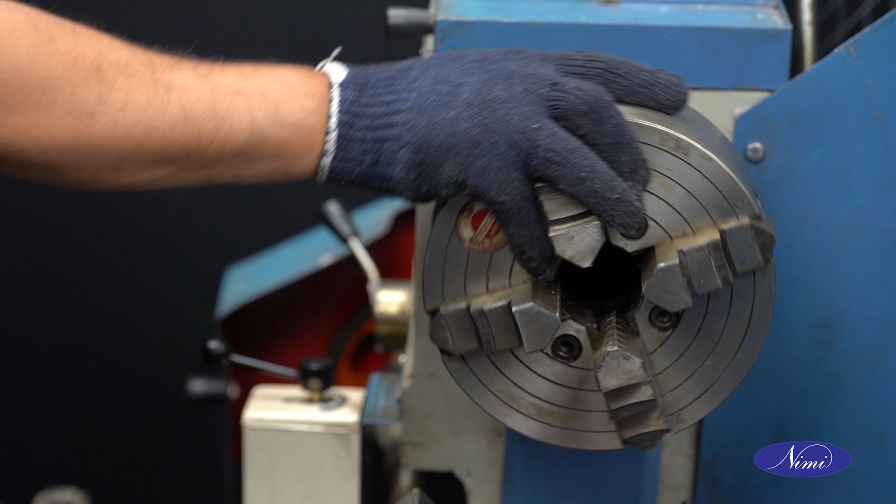Welcome to the session on mounting of chuck on machine spindle and unloading 3-jaw chuck and 4-jaw chuck. Let us begin with the session.

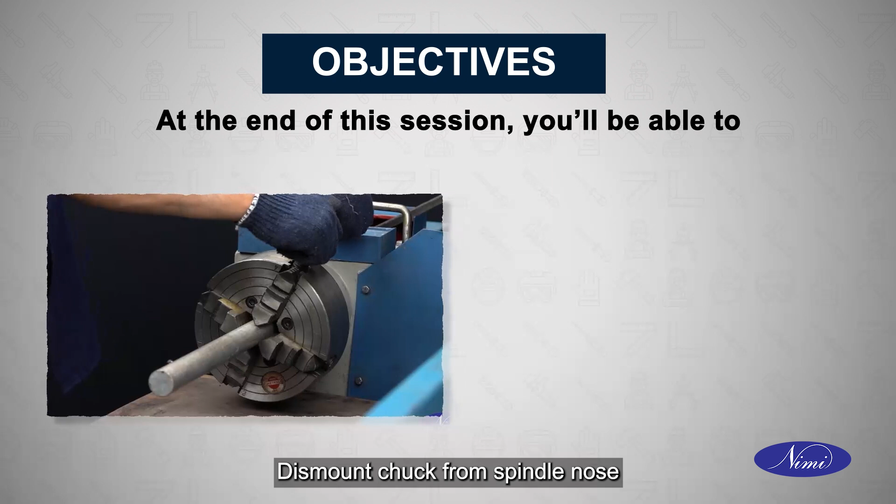Let us now take a look at the objectives of this session. At the end of this session, you will be able to dismount chuck from spindle nose, mount chucks on spindle noses.

Let us now learn about mounting chucks on spindle noses. Switch off the motor. Place the chuck on the wooden block and slide it close to the spindle nose. Set the lever to lock the spindle.

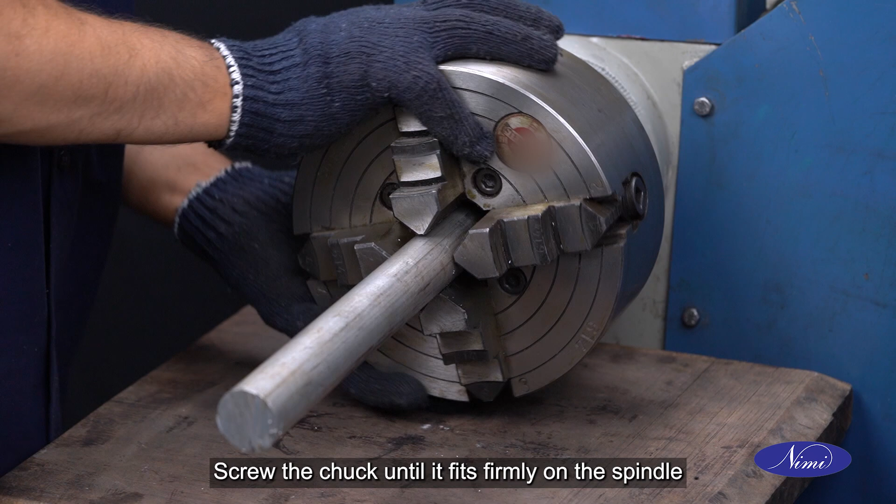Turn the spindle clockwise by hand and engage the chuck on the spindle. Screw the chuck until it fits firmly on the spindle. The chuck should easily screw into the spindle.

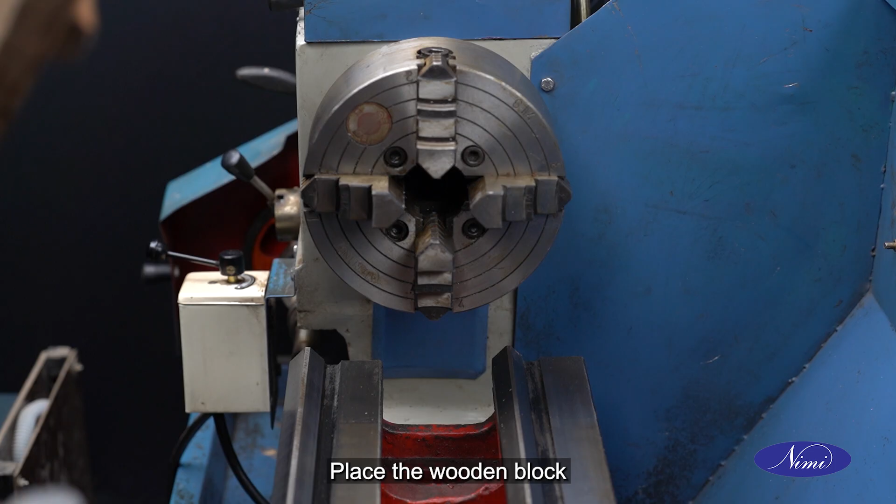Let us now learn about dismounting chucks on spindle nose. Switch off the motor. Set the lever to lock the spindle. Place the wooden block between the chuck and the lathe bed. The thickness of the wooden block should be slightly less than the distance between the chuck and the lathe bed.

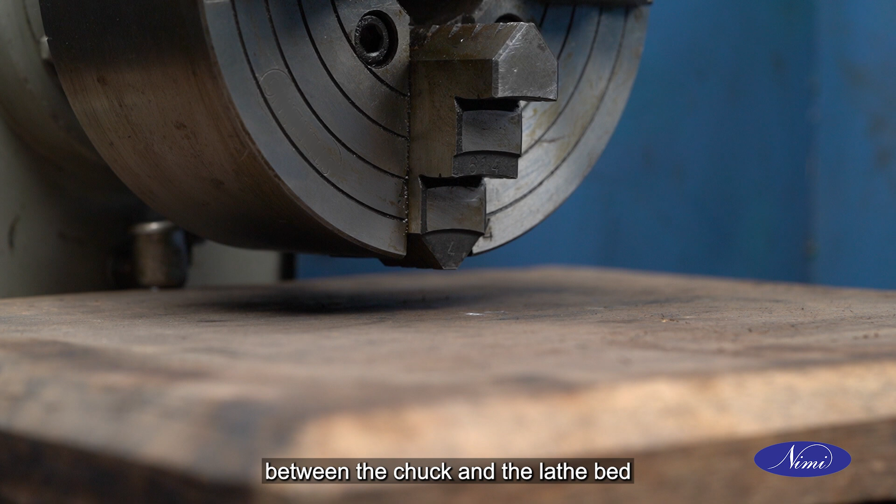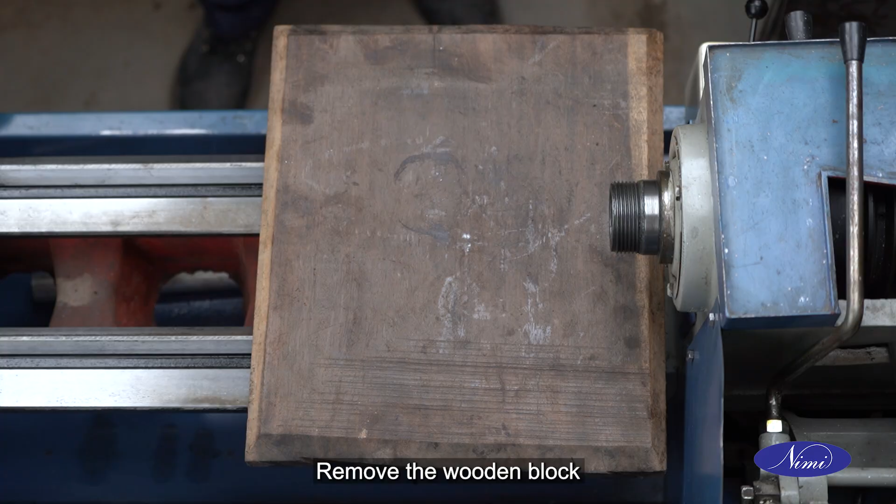Turn the lathe spindle anti-clockwise by hand to loosen the chuck from the spindle nose. Unscrew the chuck from the spindle. Remove the wooden block. Let us now learn about mounting of chuck on the cam lock spindle.

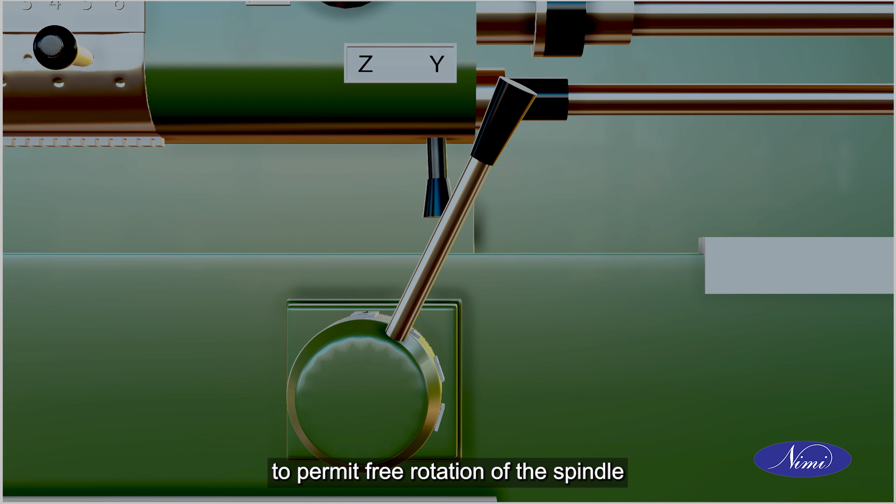Disengage the clutch to permit free rotation of the spindle. Insert the correct chuck key into the cam locking screw on the spindle. Turn each cam locking screw so that the registration line is vertical with the corresponding line on the spindle.

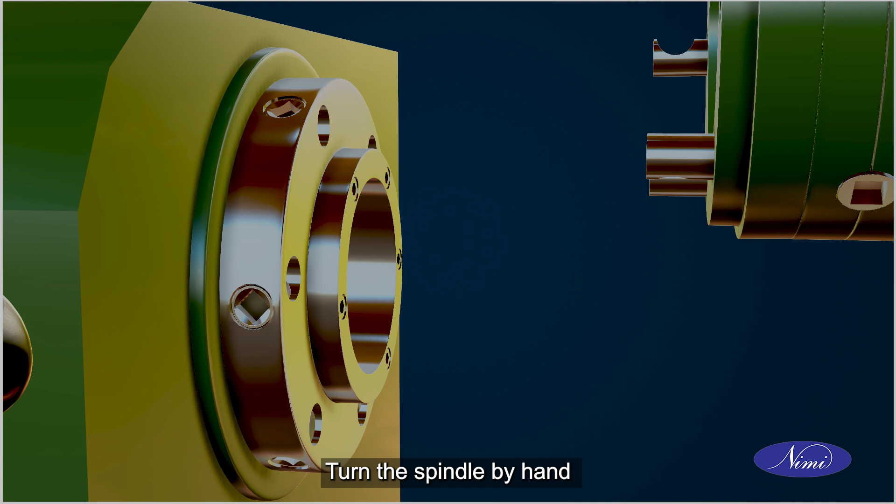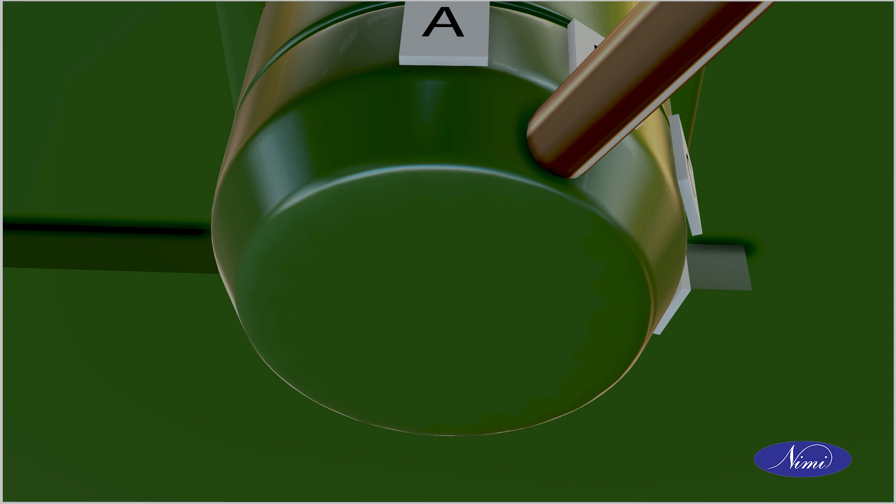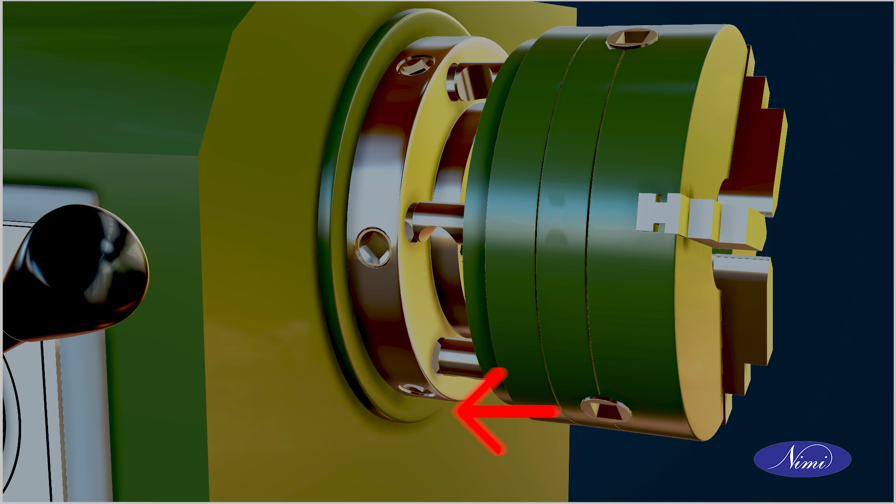Turn the spindle by hand until the clearance holes on the spindle align with the cam lock studs on the chuck. Set the speed change lever to the lowest RPM. Push the chuck on the spindle. Tighten each cam lock screw in a clockwise direction.

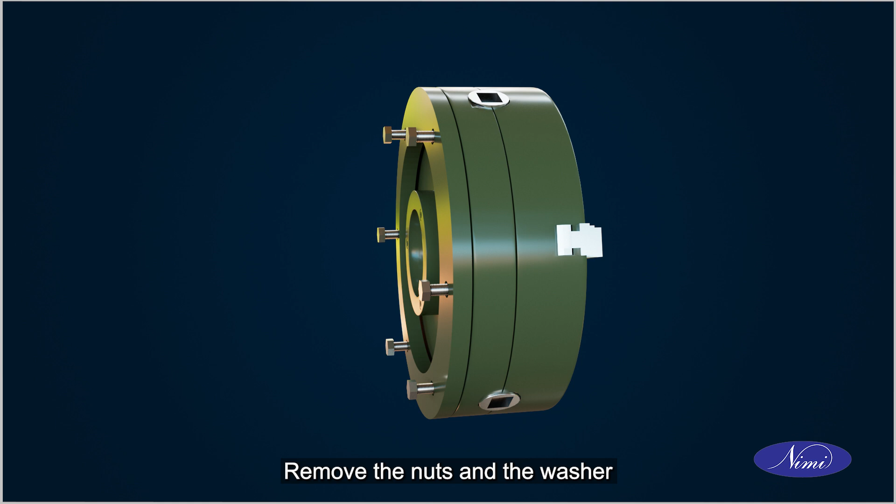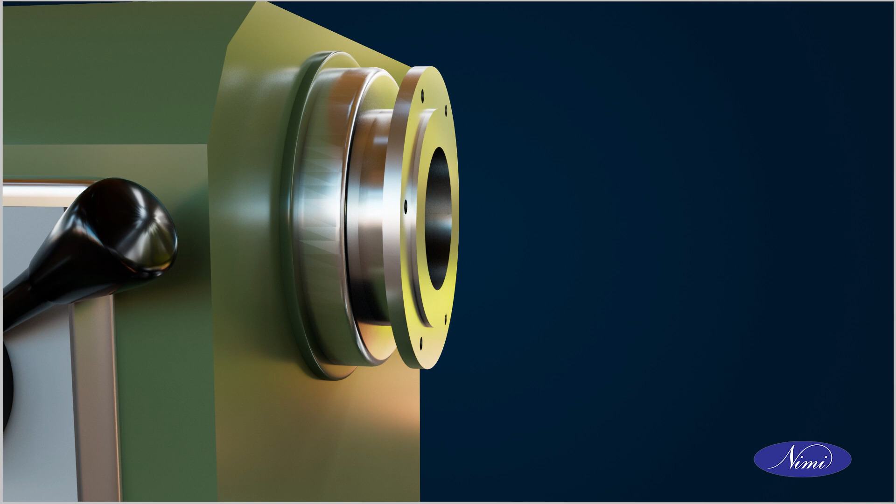Let us now learn about the mounting of the chuck on a bolted spindle. Remove the nuts and the washer from the studs on the chuck. Disengage the clutch to permit free rotation of the spindle. Turn the spindle by hand until the key in the spindle lines up with the slot in the chuck.

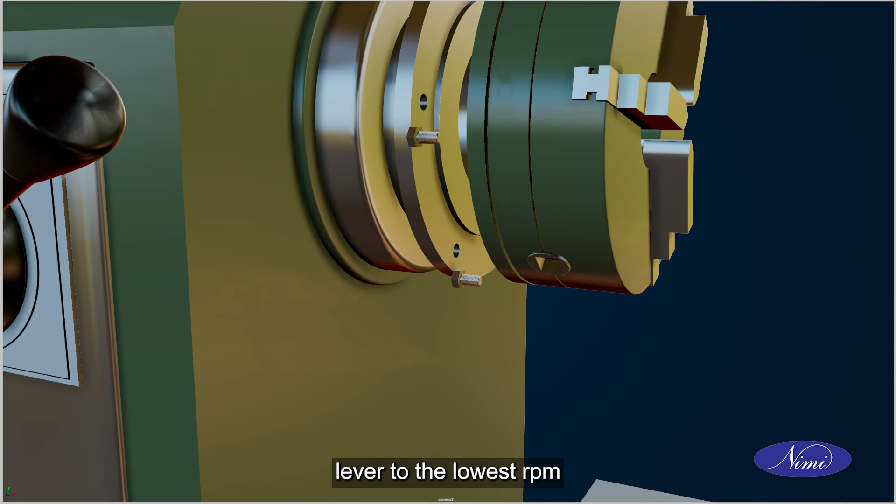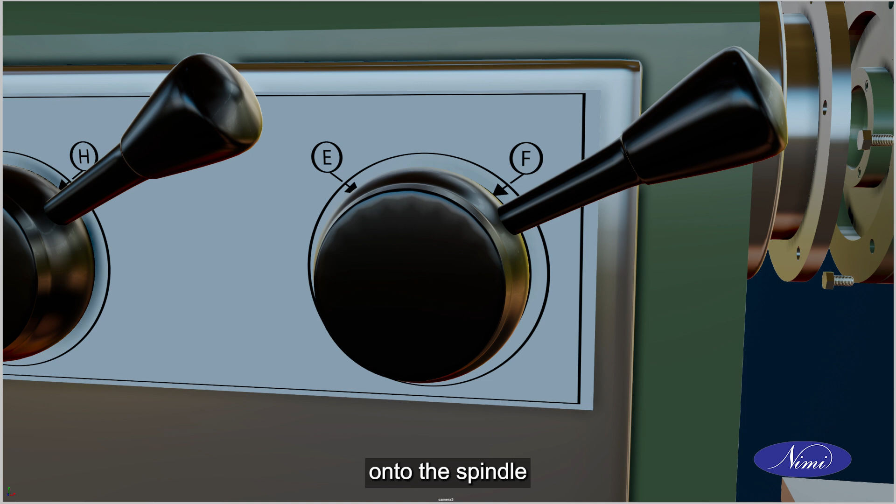Set the speed change lever to the lowest RPM. Push the chuck onto the spindle. Fit washer and nuts to the studs.

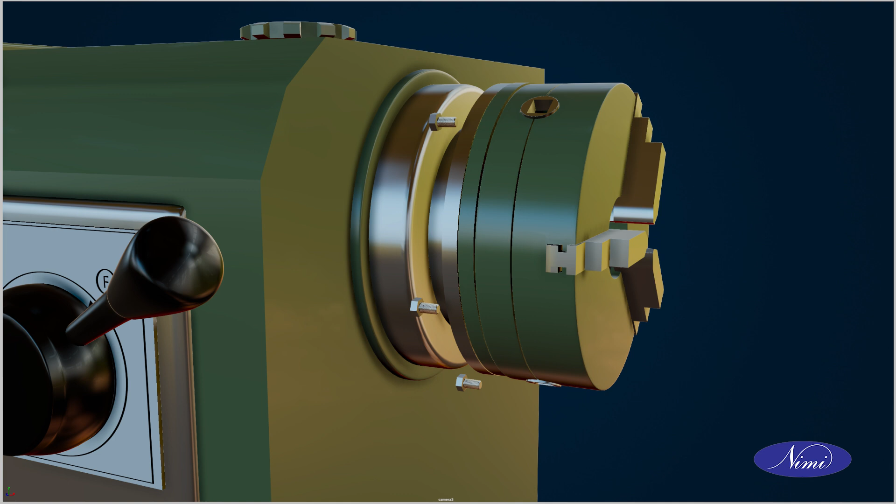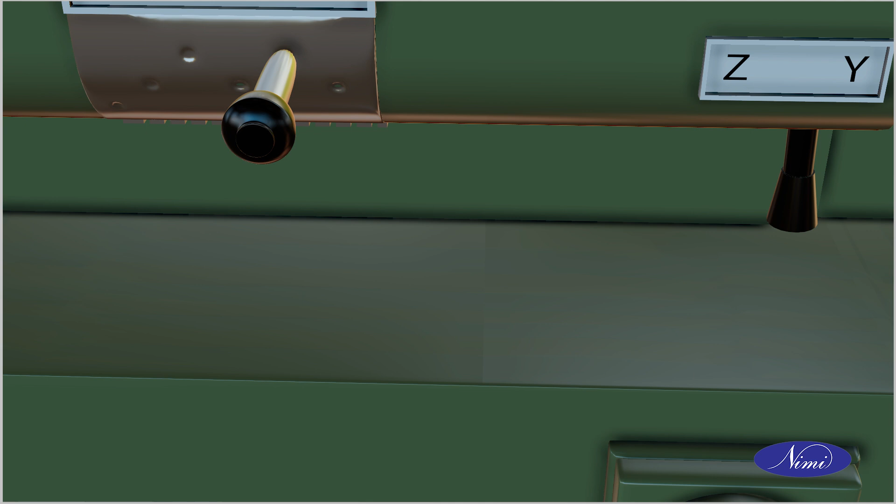Let us now learn about mounting of the chuck on a taper spindle. Turn the spindle by hand until the key on the spindle nose lines up with the keyway in the chuck. Set the speed change lever to the lowest RPM. Push the chuck onto the spindle.

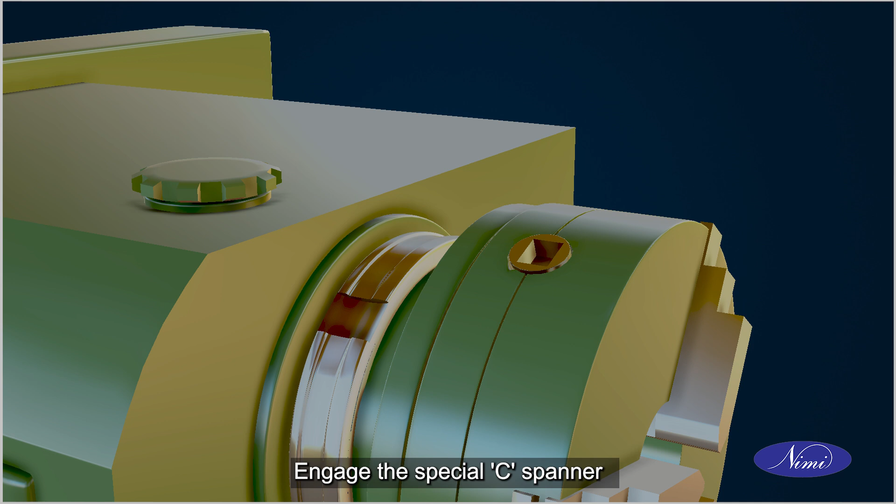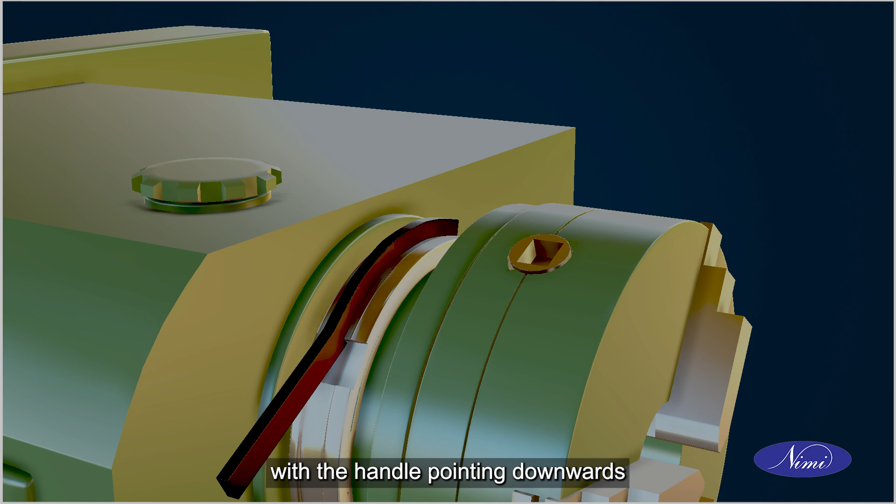Turn the locking ring anti-clockwise. Engage the special C spanner on the locking ring. The spanner should fit around the top of the locking ring with the handle pointing downwards. Grip the end of the handle with one hand. Firmly strike the other end with the other hand in an anti-clockwise direction. Securely tighten the locking ring.

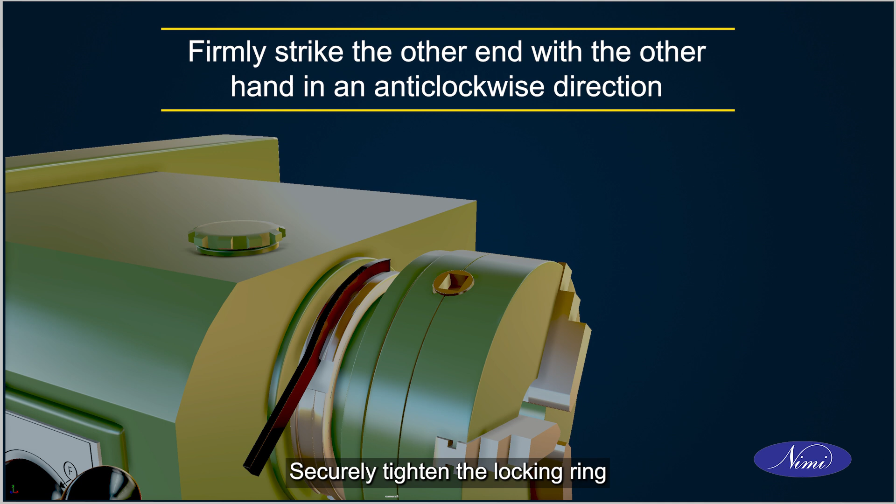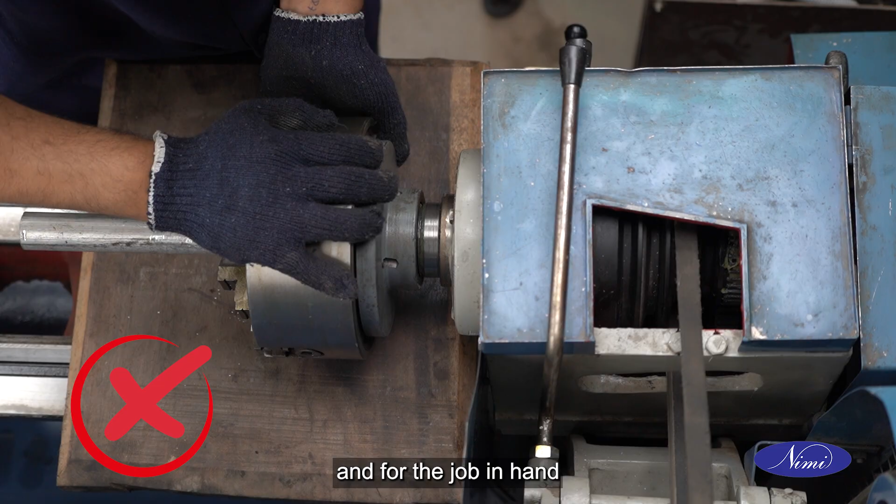Do's and don'ts of mounting and dismounting of chucks. Before attempting to mount a chuck, ensure that it is the correct one for the lathe and for the job in hand. Do not use power to mount a chuck on spindle noses. Clean all the mating parts of the chuck and spindle.

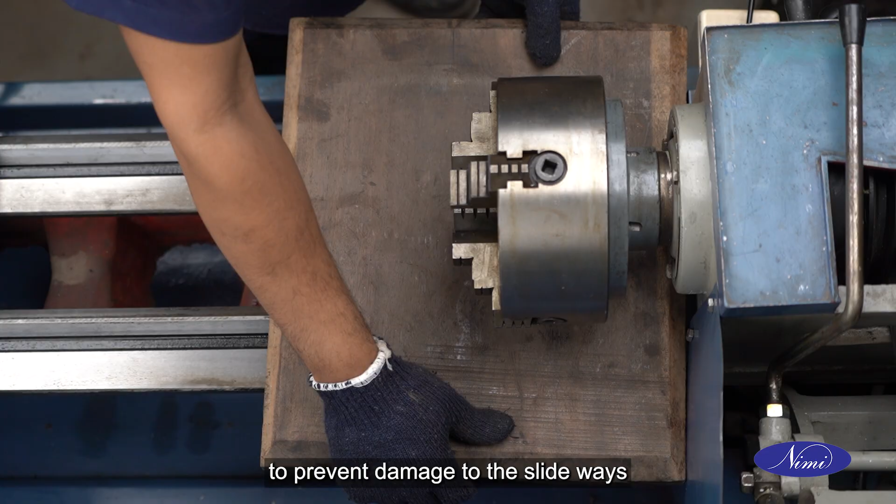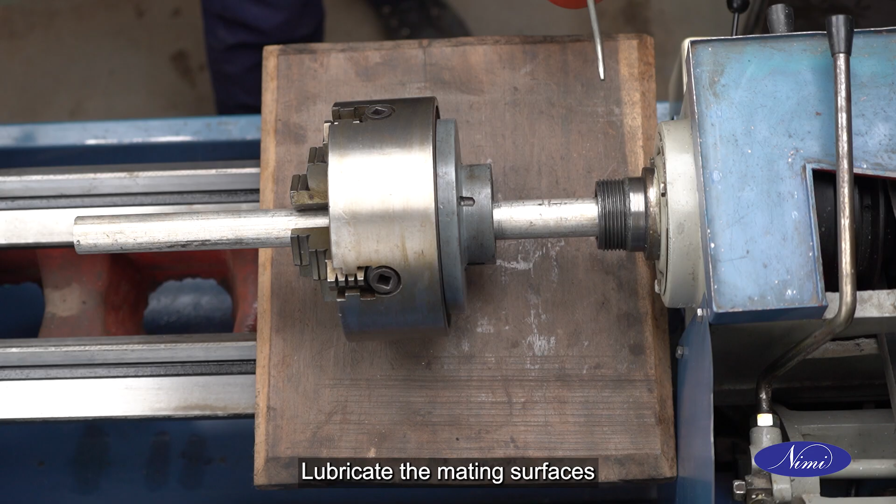Place a wooden board on the lathe bed when mounting light chucks to prevent damage to the slideways. For large chucks, place a wooden cradle between the chuck and the lathe bed. Lubricate the mating surfaces with a light film of oil.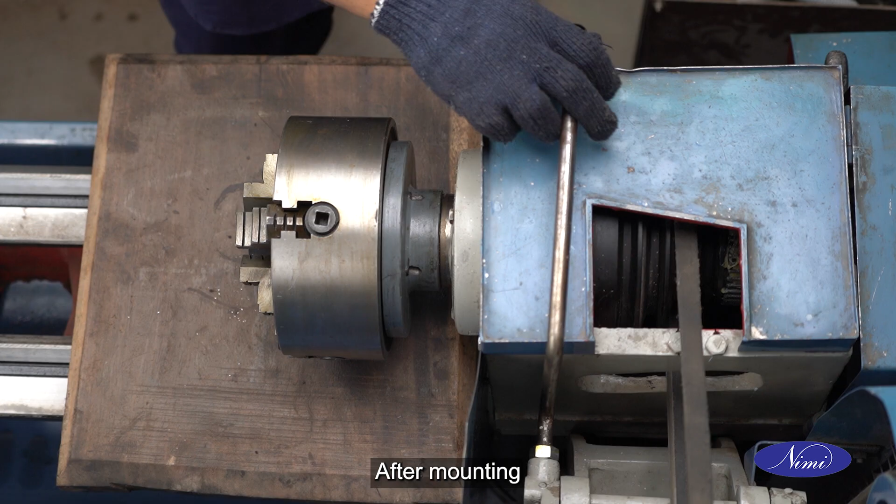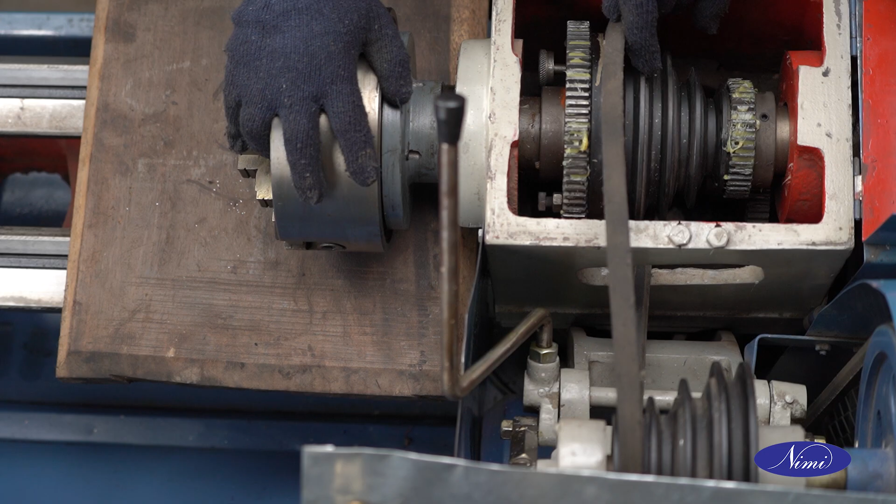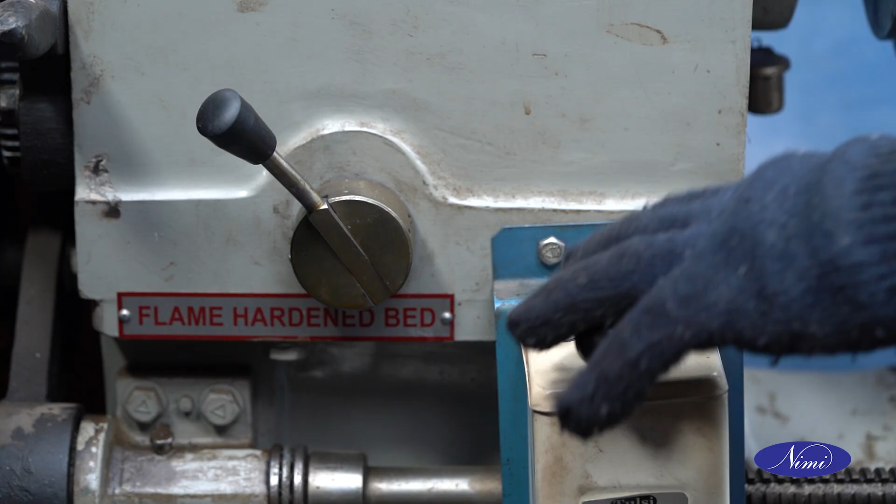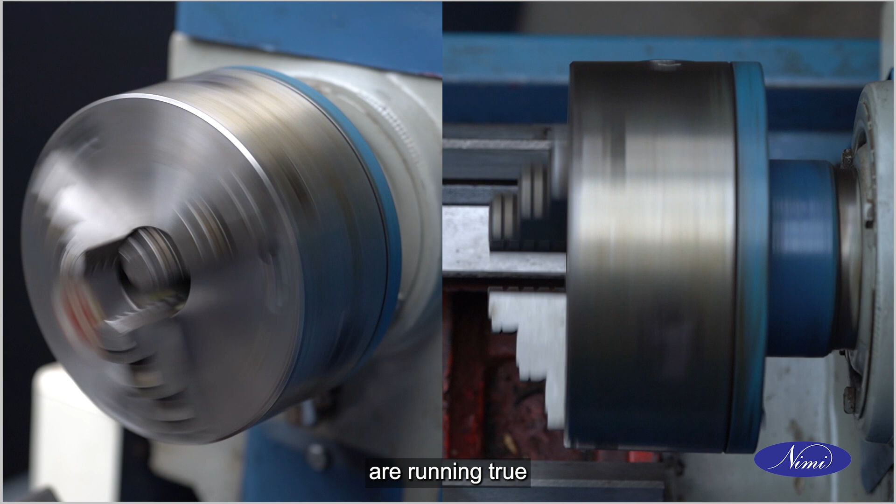After mounting, set the speed change lever to the lowest RPM. Switch on the motor. Engage the clutch lever. The chuck would now begin revolving. Check the diameter and the face of the chuck are running true by observing the surfaces.

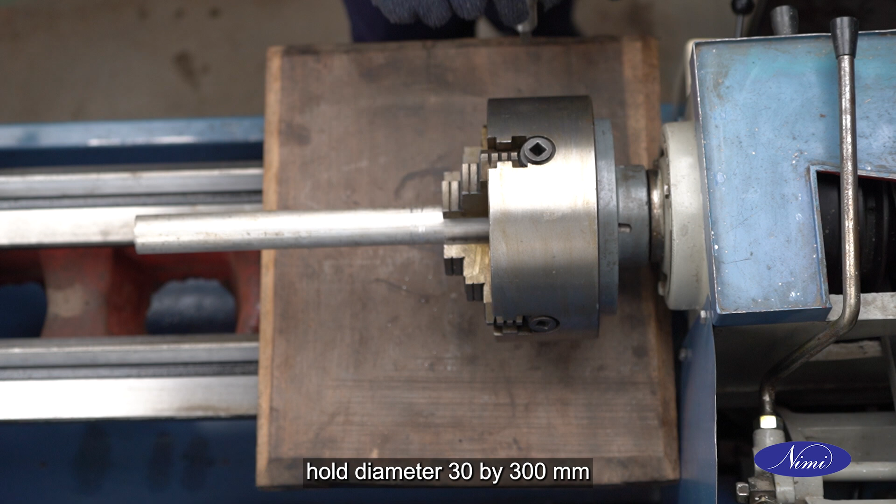Clean and store the chuck carefully after use. While dismounting a chuck, hold a diameter 30 by 300 mm iron piece projecting about 200 mm more than the chuck to enable easy and safe lifting.

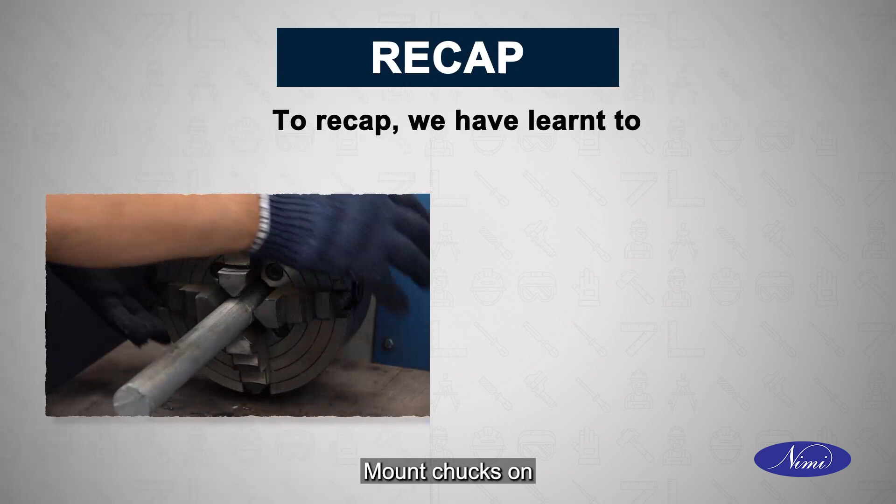To recap, we have learned to dismount chuck from spindle nose, mount chucks on spindle noses. So that's all about mounting of chuck on machine spindle and unloading 3-jaw chuck and 4-jaw chuck. Hope you have understood all the concepts and exercises.